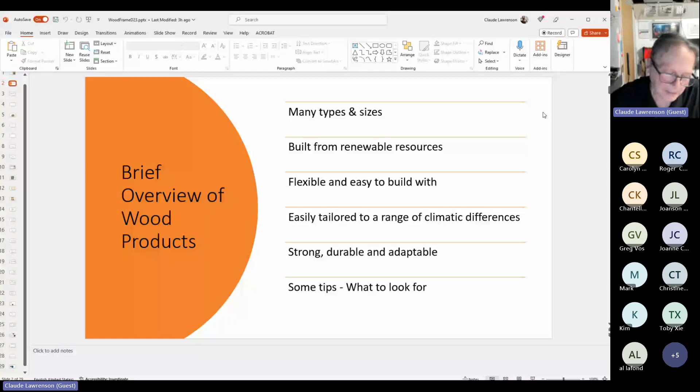Today's presentation is about construction materials. There's a lot of different construction materials out there, but one of the most common certainly is wood and wood frame construction. Wood frame construction has been around for many, many decades, and it's often the most common option chosen for building a house, and in some cases even smaller buildings. Wood is a structural material mainly used for the structure of walls, floors, and roofs.

It's used in what we call today platform framing. In the past, there was another type of framing, the old style, called balloon framing. The major difference was in balloon framing, the exterior walls went up two stories, which meant we probably had to have much longer 2x4 or 2x6 wall construction. So wood framing and its various related wood-based products is really what I'm going to talk about today.

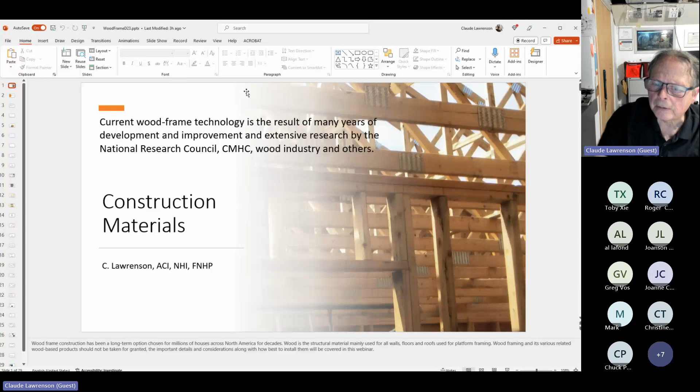Often we take it for granted, but there's some important details we need to think about when we talk about wood frame construction. We're also going to cover a little bit about purchasing or procuring wood for a construction project - a few tips and things to think about before you build that next house.

We have many types and different sizes of wood out there used for construction. It's built from a very good renewable resource, it's flexible and easy to build with, and it's easily tailored to a wide range of climatic differences between southern Canada and even far up into the northwest regions of the country. It's certainly strong, durable, and has proven to be very adaptable.

Towards the end, I'm going to summarize with some tips and things you should actually look for.

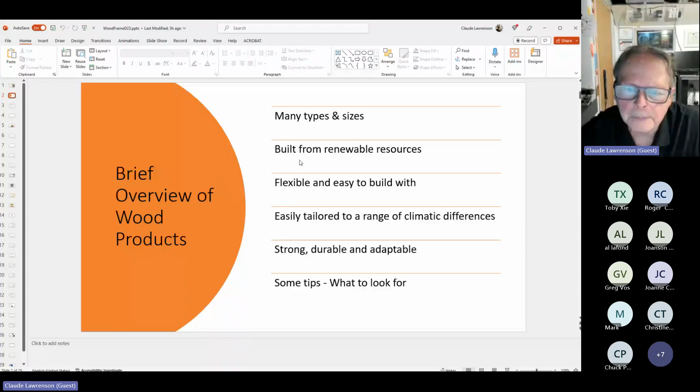A little bit of general information: there's many types of building materials, and certainly their qualities are used in house construction. What I'm really trying to focus on is that word quality with any building material. So the question is, what types of adverse conditions result in premature degradation or premature failure?

In my inspection experience, I've come across wood rot and damage to wood-based materials - and that doesn't include just wood-based materials, but other materials often attached to them, such as drywall, or perhaps even the exterior sheathing that it's being applied to the wood framing. So it requires reasonable care in its design, use, construction, and even down to the detail.

Typically our construction should be based on the National Building Code, or in some cases you may be using the Provincial Building Code. In Ontario, when I built my house, I had to follow the Ontario Building Code. I always like to remind people that the Provincial Building Code is just the provincial flavor of the National Building Code.

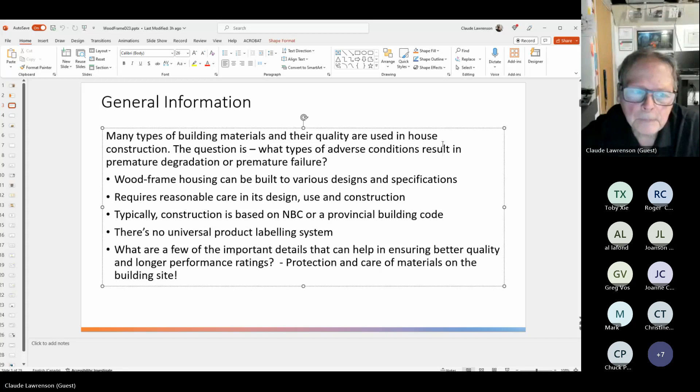Are you aware of these things when you consider housing and we talk about materials? Well, experience has shown that some materials can adversely affect adjacent materials as well as result in premature deterioration. I mentioned earlier what happens when moisture basically travels through from the interior of the house through the exterior walls and creates damage to the wood framing.

So again, there's going to be other damage to the adjacent materials, as I mentioned earlier - whether it's the sheathing, or maybe on the inside, perhaps even the gypsum board, or what most people would call the drywall.

Lumber used for construction in Canada is grade stamped, and I think that's a key thing I want to focus on in this discussion - are you aware that there are grade stamps you should be looking for on lumber, to show that it conforms to the NLGA, the National Lumber Grades Authority, grading rules for Canadian lumber?

The National Building Code lists minimum grades for various uses of lumber and wood frame construction. We'll take a peek at a few of those National Building Code requirements.

Another thing we need to think about is not simply the 2x4 or 2x6, or what some people like to call the stick or the lumber itself. How about engineered wood products? They're routinely used in wood frame construction. These products are equivalent in strength compared to dimensional lumber, but use less lumber, basically using wood fibers in various different forms and shapes.

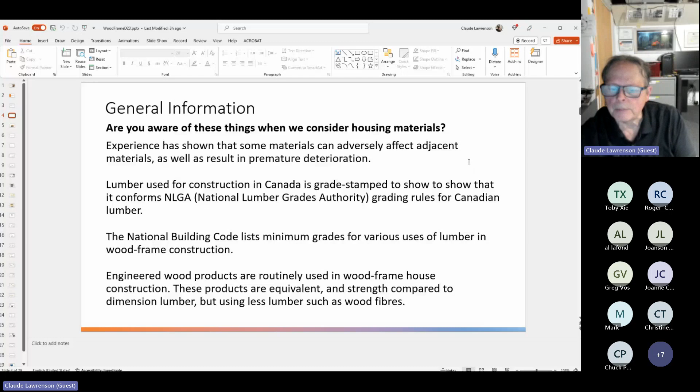This is an illustration from our technical guide for northern housing, and it talks about wood structures in general. When we take a look at this particular illustration, we need to think about the residential building being divided into some main categories. It says 4 main categories, but actually I think it's probably more like 5. So we have the floor beams at the lower portion, the darker orange floor framing, the tan or brownish wall framing with the wall studs and sheathing, and the roof framing. But technically speaking, I actually think there's a 5th one.

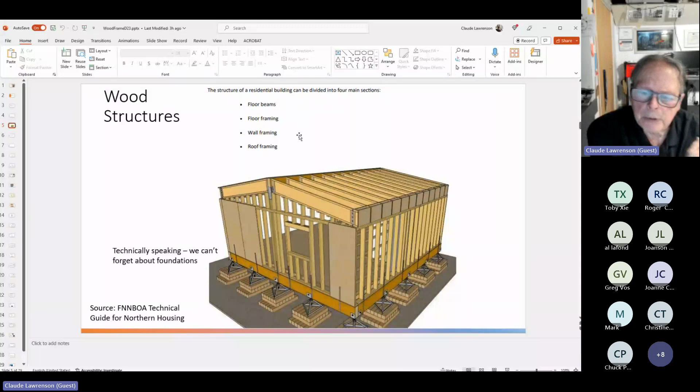We can't really forget about the foundations, because quite often there can be wood framing involved with even the foundations, whether it's pressure treated wood, or how the foundations are going to be created, in some cases by some type of wood framing. The source here is from the technical guide for northern housing, so if you haven't had an opportunity, it's something you should look at, which is very informative.

Next, I'm going to talk a little bit about the Canadian Wood Council. It was founded in 1959 and is Canada's unifying voice for the wood product industry. It's the National Federation of Associations that basically deal with wood, and their members represent hundreds of manufacturers across the country. The Wood Council participates extensively in the development of building codes, and in some of the changes that happen within the building code.

For example, if we take a look at things like the design of wood frame structures for 3 stories or less, maximum spans for lumber for beams, floor and roof joists, roof rafters, and so on - again, that's all dictated by those requirements within the building code.

There's lumber and stud tables. So again, we can basically look at spans, or how high can lumber studs go. Is it okay to use a 2x4 on a 2-story high building? What happens if it goes to maybe 3 stories?

And there's also a nailing schedule. Within the building code, it talks about what size nails are the minimum requirement as far as nailing is concerned, and it's not just the size, it's also the number - do we need 2, 3, or more? Or are other types of fasteners acceptable? And of course we need to not forget about, in some cases, permanent wood foundations.

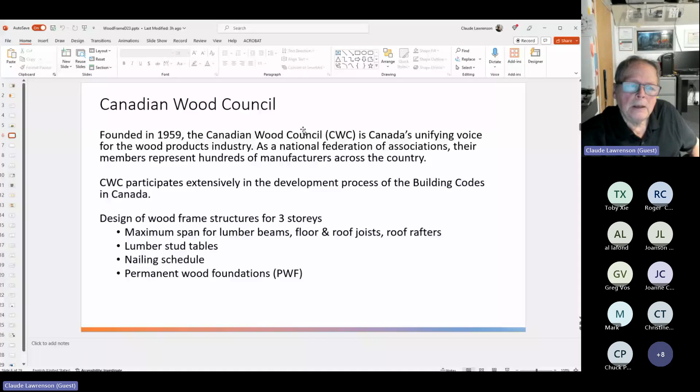So I wanted to back up a little bit and talk about what we see in a typical lumber yard - I like to call it the classification known as yard lumber. So what is a board? When we think of the different terms such as boards, dimension lumber, timbers, factory or stock lumber, these all have some technical reference guidelines.

Boards are typically an inch to inch and a half thick. They're graded for appearance, often used as siding or interior trim when we think of a board.

How about dimension lumber? Well, dimension lumber are things such as the 2x4. Is it really 2 inches? The answer is no - that's what we call the nominal dimension. The actual dimension of a 2x4 is something in the range of an inch and a half by 3.5, an actual size by the time it's finished and dressed down. In some cases they're going to be wider, and they're going to also be graded for strength or stress rather than just simply appearance. Commonly we see different classifications, which we will take a look at shortly.

So light framing, joists and planks. Joists and planks go into the 6-inch and wider range.

Decking, 4-inch and wider range, and sometimes we get into decking select and what they call commercial grade. Timbers are often basically something that's quite a bit larger, so 5x5 and larger, again graded for strength and durability, often stocked in green undressed condition.

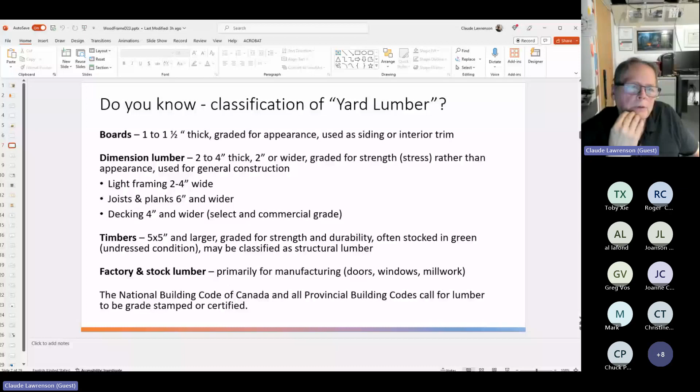Well, what's this proper grading all about? So the lumber grading is essential because it helps ensure the wood is suitable for its intended use. If a piece of lumber is incorrectly graded, it may not be strong enough for its intended application, which could lead to structural failure and potentially dangerous consequences.

So in this little chart, the chart is actually a portion, an illustrated snap capture of table 923.42. 923 is basically your wood frame construction in the building code. And if we take a look at it, you'll see the most common grades of lumber include, and I've listed them off to the side: select structural, and then I pointed to it in the actual table. Number 1 common, number 2 common, and number 3 common.

Not so much do they use the word common, but quite often when we refer to it, it's just number 1, number 2, or number 3 grade. We can see if we take a look at this particular caption of the table, it calls it the commercial designation. So we can have different types of species of wood lumber. This one I've chosen is what we call SPF, spruce, pine, and fir. You could have certainly other materials, it could be fir, it could be other types of materials, as I mentioned.

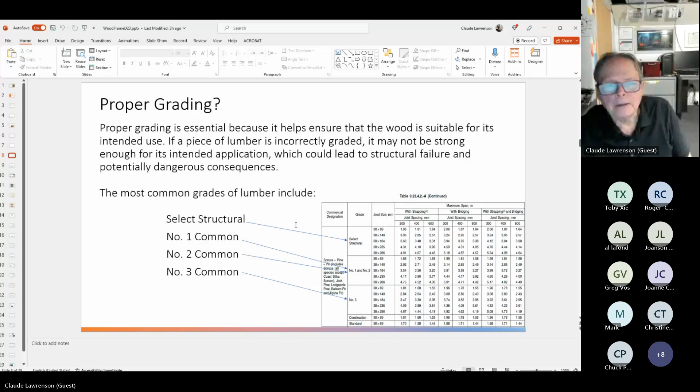Well, when we take a look at lumber and wood products, this is again a capture from the National Building Code. It talks about grade marking. So if we take a look at one of the requirements, it says lumber for joists, rafters, trusses, and beams, and for the uses listed in table 9321, basically all our structural framing lumber, or even framing lumber, not alone just structural, shall be identified by a grade stamp. So that's where I like to halt for a moment and talk about this.

But again, minimum lumber grades for specific end use. So again, when we look at the National Building Code, in the clause requirement up top, we take a look at the use category. For example, stud wall framing, the very first one, and I'll jump all the way down to say roof sheathing or subflooring, wall sheathing when required as a nailing base. And it talks about what types of boards and what types of framing and what type of species and categories. So you can see here stud standard number 2 grade for stud wall framing is acceptable.

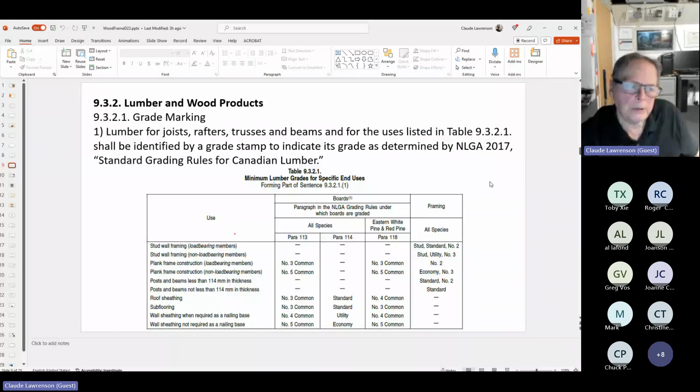Let's take a look at what grading is all about. I've shown a few examples here. Off to the side, we can see this is off of a sheet of plywood. It's got that greenish tinge, so it's been treated lumber. We can see some few dark spots - those are the knots within the plywood skin itself.

Over in the picture below, we see these are 2x4s, and we can see the word kind of on an angle there. These are select grade 2x4s, and we see the actual stamp above - that's the mill. So that's where that information comes from, where it was actually milled and where it comes from. So there's material here, and we also see it's select grade. Select grade, by the way, is a pretty high standard.

When we come back to the actual grading and this depiction, here's an example of a grade mark in the lower left. It says it's stud grade, so it's for a stud. It's HRA, heat resistant adhesive was used, so it becomes stronger. If we take a look at another example here, we see HRA again, and a little more information - this one says S-dry, so it's drier.

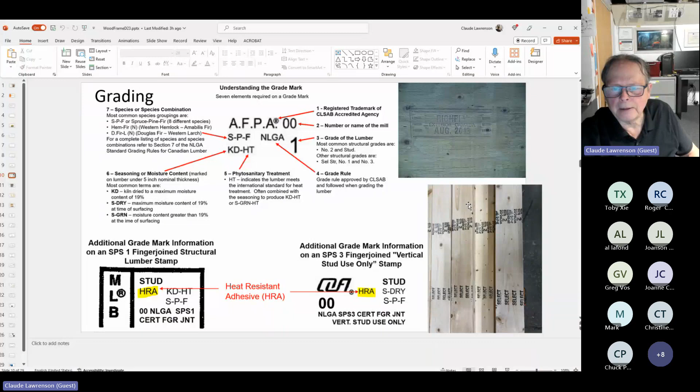Let's take a look at another building product. In this case, we have floor joists. These floor joists, an engineered wood building product, should be identified by some type of grading mark. In this case, it's CCMC. Actually, these floor joists have been tested through the National Research Council of Canada. That's great because it tells us automatically, if I'm the inspector on the job, it meets the building code. There's no question about it.

Over to the side here is a reduced down copy of the 5 or 6 pages of the actual testing of the product material itself. You'll see, for example, it says here, this was TJI, CCMC 13132-R. What do we see up here? These are approved - they've been tested by the National Research Council. These are automatically accepted within the building code. So again, look for the label, in this case grade or grade marks, to indicate that this is approved material. It meets a standard that in some cases goes even beyond the minimum base standard.

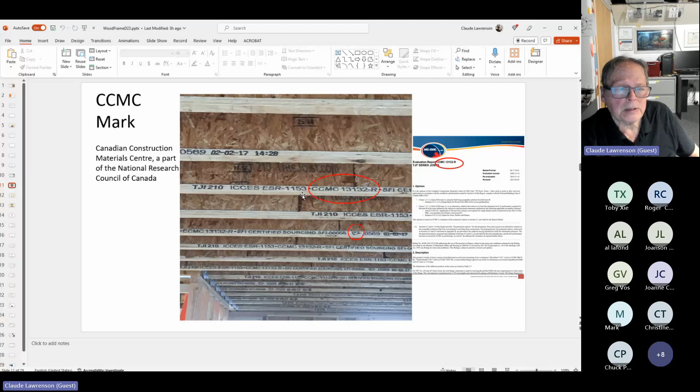Let's take a look at a few other views here. So we see plywood grading - how is plywood graded? We can see there's a grade A, a grade B, and a grade C. A lot of this, from a visual perspective, is - grade A, I don't see a lot of knots, very few if any. Grade B, some dimples here and there. And grade C, we can see more of them.

This was from the source of the Canadian Wood Council, taking a look at their information. Modified construction varies from standard plywood in that the grain direction of the plies, the number of plies, and the thickness of the panel is modified. Plywood is plies in alternating sheets, basically creating our 4x8 sheet of plywood. Standard plywood, symmetrical about the center ply, is used for the most structural sheathing. Modified plywood is used for the most formwork, so because it's going to be below grade, grade C is probably better. But if you wanted something a little more finished looking, then we would take a look at this particular grade A.

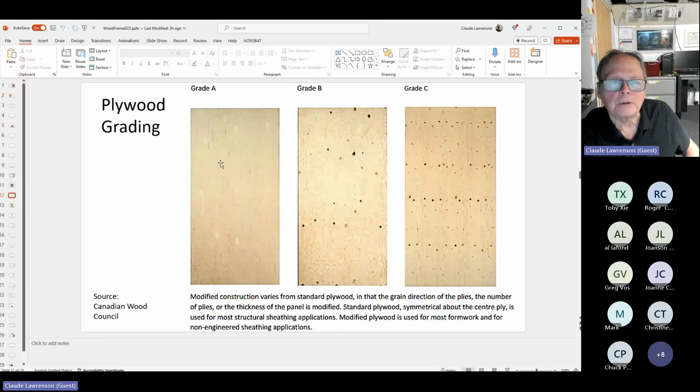National Building Code 2020 version. This is the most current version.

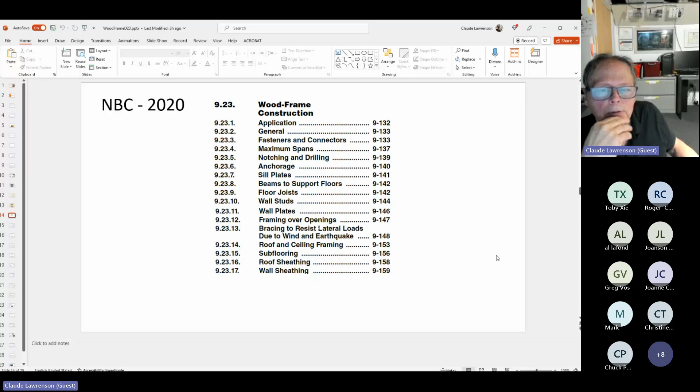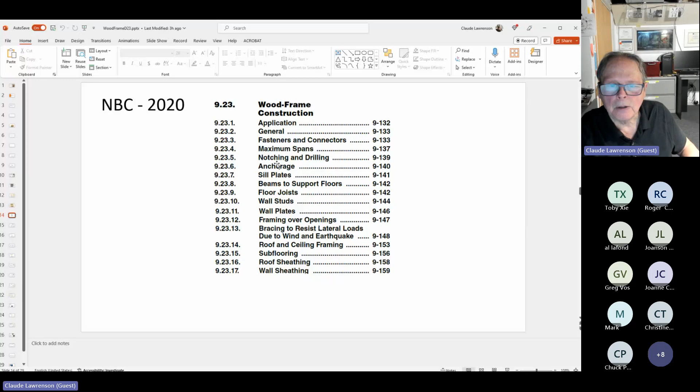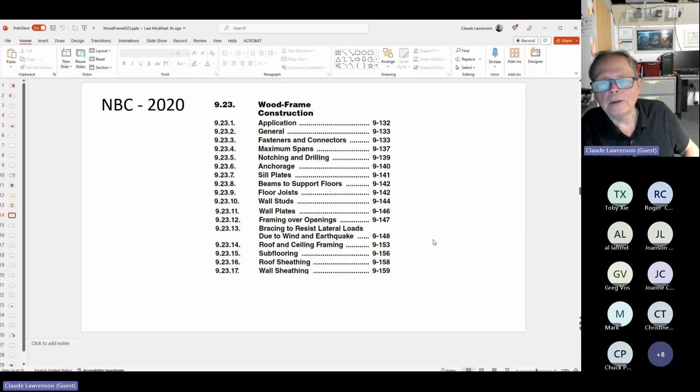I mentioned section 923, and we can see there we have 20-some pages virtually of wood frame construction requirements. Everything from the application to the fastener connections to spans, what happens if we want to cut, notch, or drill, how do we anchor, and going on to beams, joists, wall studs, and so on, subflooring. So there's a lot within the building code that we need to be aware of when we think about wood frame construction.

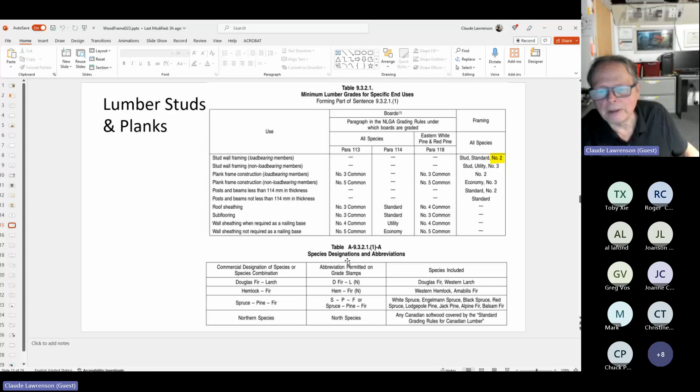When we take a look at code requirements, this is where we can call on the inspector to either say what I see is good, or perhaps maybe it's not so good, and we need to rethink what's going on here. So enforcing code as an inspector, we could say section 9322 on lumber grade says, except for joists, rafters, trusses, and beams, visually graded lumber shall conform to the grades in that particular table. What happens if what you have doesn't? Well, I guess that's up to the local authority having jurisdiction.

And then it goes on to machine stress rated lumber, OSB, wafer board, plywood markings, moisture content. Another key factor is when we talk about moisture content, I have a moisture meter, both one that has a metal probe, and I can measure the amount of moisture in the wood. The moisture content of lumber shall be not more than 19%. Well, if it's left out in the rain and the snow and the elements, it's certainly not going to be 19%. In fact, sometimes you're even lucky if it's 19% coming out of the lumber yard, because did they leave it out in the rain and the snow and the elements?

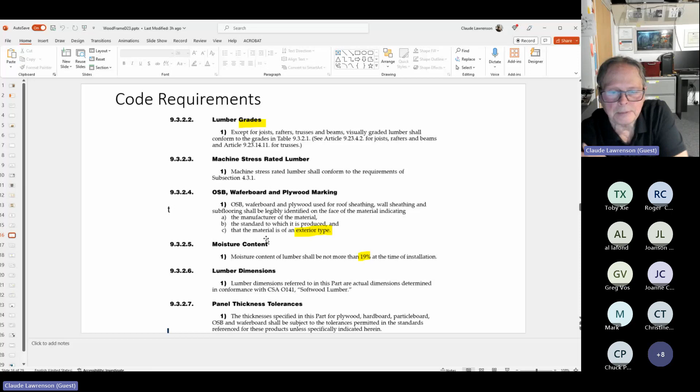I just wanted to talk briefly about termites. We may not hear too much about termites in all areas, but there is a requirement within the code for protection regarding termites, and certainly on the other topic there, decay protection.

In doing inspections, it was quite often that I would find termites, especially in old wood cottages. The termites came in from the south, and actually they didn't even come in from the south of the USA. They were basically brought over by other elements called ships across the ocean and somehow infected wood in areas such as the deep south of the USA and basically migrated north.

So even for my area, areas such as getting up towards Toronto, there can be termites. So we have to look, especially as an inspector, to see is there termite damage? Or the other way of looking at it, for new construction, because it's in a termite zone, do we have to have protection for the wood itself?

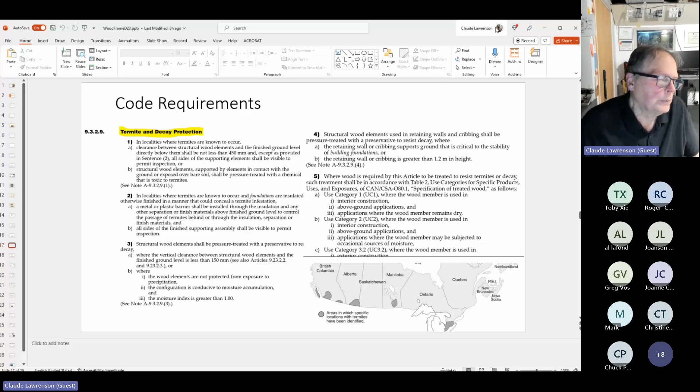Let's talk a little bit about the structural side of things. The Building Code Section 9.4 talks about the structural requirements. Well, we don't necessarily need an architect or an engineer to design all buildings. We could have somebody who is very good at drawing house plans and able to use the building code and follow it to come up with a good set of drawings to build a house or building.

But if we take a look at the general structural design requirements in the building code, subject to application limitations defined elsewhere in this part, structural members and their connections shall: A, conform to the requirements provided elsewhere in this part. Sounds like a whole bunch of legal language, and it technically is. Be designed in accordance to good engineering practice, or be designed in accordance with Part 4 using the loads and deflections, which basically means engineering.

So when we take a look at the structural requirements, pretty much most residential buildings, unless they get to be very large, you can basically build from the old traditional building standards, as long as it follows the current building code. There are some application limitations, as it says: is it 600 square meters? Is it 3 stories or less? Is it residential? And so on. There are specific requirements spelled out elsewhere in the building code when it comes to structural requirements.

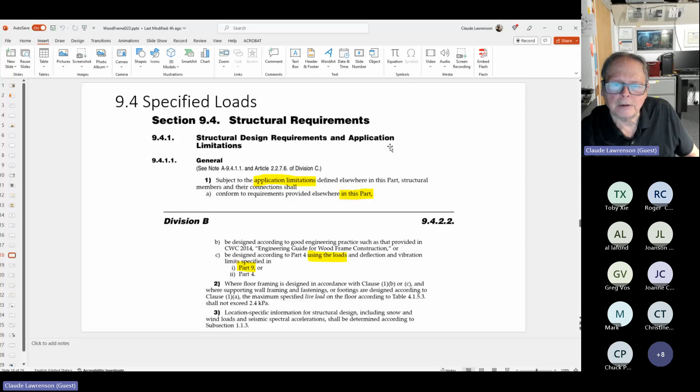But I want to touch a little bit on the specified loads, because in areas in the extreme north, we might have a roof that accumulates a lot of snow on it. Is there a chance for roof collapse? The answer could be yes. Likewise, we want to make sure that from a structural point of view, it's a safe living environment for the occupants of those particular homes or buildings.

Another way to take a look at this is the specified loads. This applies to light frame construction whose walls, floor, and roof planes are generally comprised of frames of small repetitive structural members, such as 2x4s, 2x8 floor joists, 2x6 ceiling joists, or 2x6 roof joists, and so on. The roof and wall planes are clad, sheathed, or braced on at least one side.

Typically when we're looking at sheathing, we probably would put some type of plywood sheathing, or it might even be rigid board type insulation. But with that, I usually recommend some diagonal bracing, because we need to stop the wood frame from moving side to side, racking.

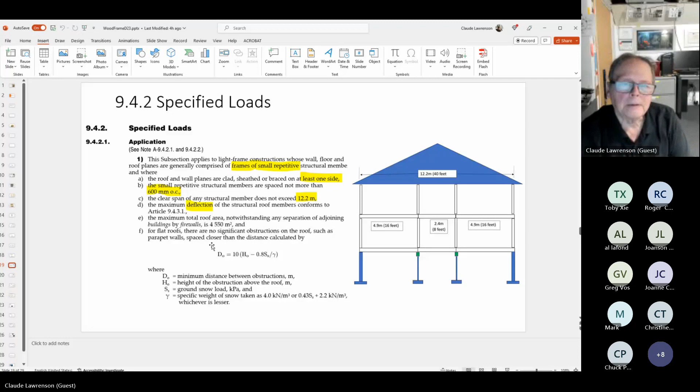Double the requirements between Saskatoon and Churchill, or almost double. And another one, Lac du Bonnet, 54.3 pounds per square foot. So when we take a look at the building code, these are things we need to think about when we're building. A 2x6 rafter in Saskatoon probably would work, but when we take a look at Churchill, maybe we need something much deeper and stronger to carry this roof load, because this is based on snow on a roof.

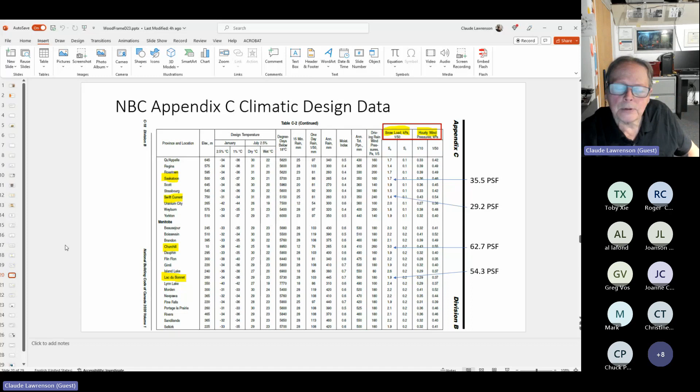And of course there's other categories here, for heating and cooling design temperatures. And over here we can see wind pressure and accumulation of rain and so on. So I just wanted to point out that when we use the building code, it helps us design better. That's sometimes one of the elements that's missing - a set of drawings isn't always a good set of drawings, though sometimes there are some great sets of drawings out there.

On the topic of structure, I want to talk a little bit about deflection - maybe another term you might use, there's a dip in the floor. How much of a dip is actually acceptable by the building code? When we talk about deflection, I like to use a little illustration because sometimes the words get a little muddied, being legal mumbo jumbo of code requirements. Sometimes a little illustration helps indicate what deflection is.

Again, the building code talks about how do we control deflection. What should we look for as a minimum building standard so people don't end up with these big dips or low spots on the floor? And what is acceptable? Again, the code talks about that.

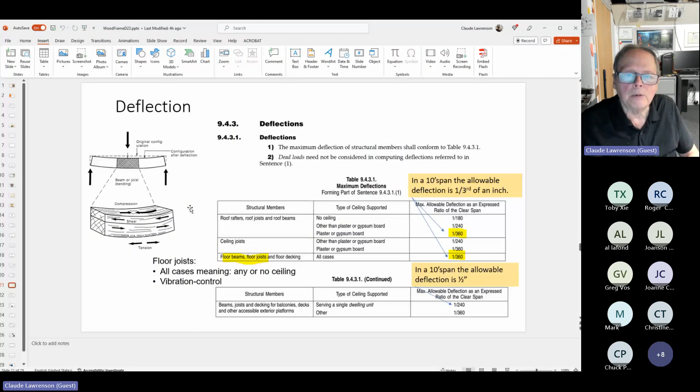So how do you stop the floors from deflecting? Well, sometimes it depends on what they call camber or crown up or crown down. Again, in the framing, hopefully the framers understand that you always want to have that crown facing up.

Another area, when we talk about engineered wood products such as those TJIs we looked at earlier, one of the big things a lot of fire departments are concerned about is fire and pre-engineered floor joists. A lot of homes and buildings today use this type of flooring system. But what we have to remember is pre-engineered floor joists are made up of wood chips and glue, and they burn twice as fast as traditional wood floor joists. Traditional lumber joists burn in approximately 15 minutes versus 4 to 6 minutes for a wood chip joist.

I've heard in some instances where the fire department, if they knew it was an engineered wood product, they will not enter the building for their own safety - the floor could collapse on them. And certainly if it collapses, someone could be seriously injured or perhaps even killed.

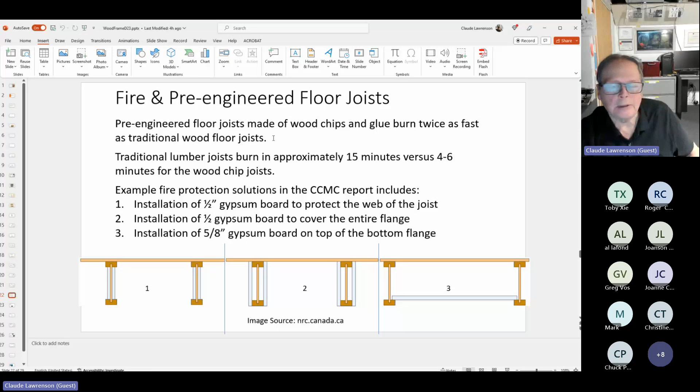Okay, let's talk a little bit about the material on the outside. In the building code they like to call it cladding, which is basically your outside finish. The building code requires a sealant to be applied to any location through which rain or snow would be able to penetrate and back up the assembly. It talks about the required sealant.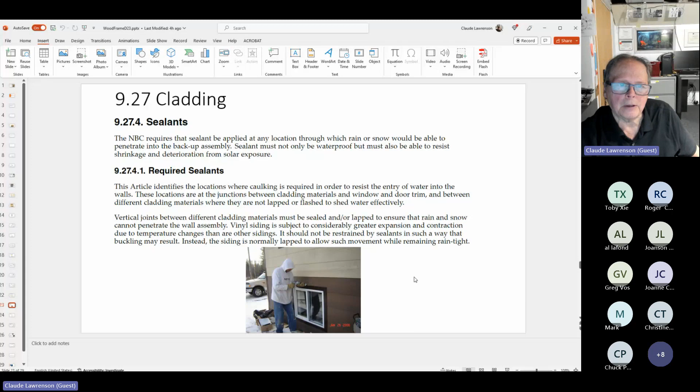So again, under cladding, they talk about lumber siding. Lumber siding shall be sound, free of knot holes, loose knots, through checks or splits. Again, some description of the characteristics of different defects within wood. It talks about the thickness - we just don't want something thin on the sheathing, or the cladding rather, but rather something of substance.

And what about the joints? They talk about lumber siding shall prevent water from entering at the joints by the use of lapped or matched joints or by vertical wood battens. So again, there's the description of basically the material itself from the point of view of thickness and width, and how do we deal with the joints.

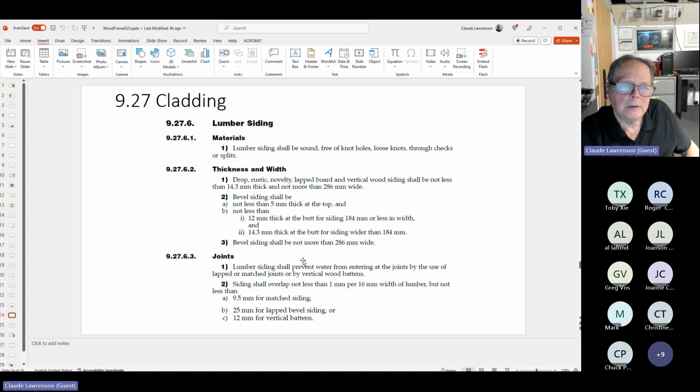So any openings around the materials, such as at that window or a door, needs to be sealed. We must think about it must be installed with proper joint treatment and flashing. Requires installation according to manufacturer's instructions - again, does everybody read the manufacturer's instructions? Not always. In absence of recommendations, the code requires minimum lap coverage depending on the siding material.

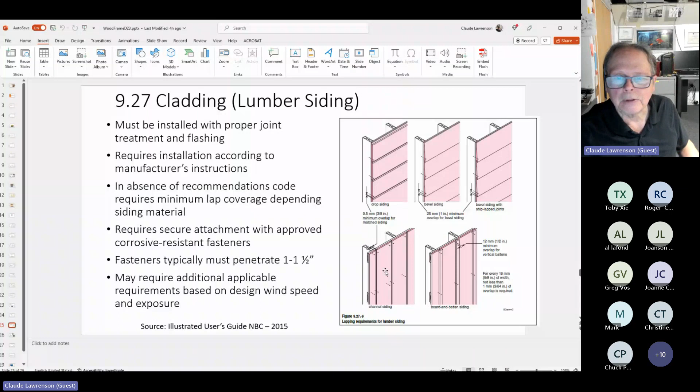Requires secure attachment with approved corrosive resistant fasteners. So again, we go into the fasteners - they must penetrate 1 inch to 1.5 inches through the material. May require additional applicable requirements based on the design, wind speed, and certainly exposure. Again, one size does not always fit all because we have to look at the climatic differences between the north of a province and the south of a province, right?

So let's get down to a basic review, kind of getting towards the wrap up here. Check the material for certification and grading labels. So again, you can see we have our grading stamps here, where it came from, and basically what grade it falls under - in this case, select. Is the material suitable for the purpose it's intended for? That's what the building code basically asks.

Verify material quality. Are you getting exactly what you paid for? Sometimes I've visited, and maybe some of you have visited, those ones that look more like a hockey stick than an actual straight piece of 2x4 or any other type of lumber. Are they sort of, kind of out of whack? Got a big bow in them?

Are the joists and beams installed with the high point, the crown, pointing upwards? I mentioned that before. So we can see here, if the crown's pointed down, you're already fighting that whole early commentary about adding to the deflection. But if we basically eye along the edge of either the top or bottom, we can see if it's either dipping downwards or upwards. It should always be installed by a good framer with what they call the crown up.

Once we put our weight on it, it's going to basically settle down to a more level playing field, and certainly not cause these big dips in a floor system.

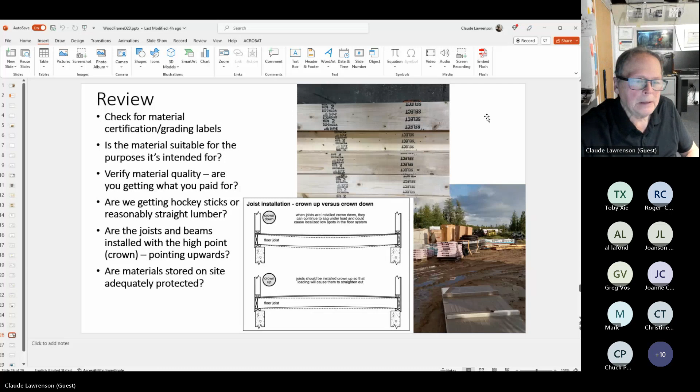Okay, so getting down to characteristics, materials, and appliance systems and equipment. What does the building code say when it comes to enforcement? All materials, appliances, systems, and equipment installed to meet the requirements of the code shall possess the necessary characteristics to perform their intended functions when installed in a building.

Some of the characteristics I pointed out earlier are simply the things we need to look for when we think about even just wood framing. Wood building products are subject to moisture, subject to bending stresses, subject to deflection. Are we getting the right material? Is it okay for the span or the actual work it's supposed to perform?

Again, storage on the building site. All building materials and appliances on the building site shall be stored in such a way to prevent deterioration or impairment of their essential properties. When we take a look at things stored out in the elements, it certainly raises the question of whether it's going to be good enough for that particular build.

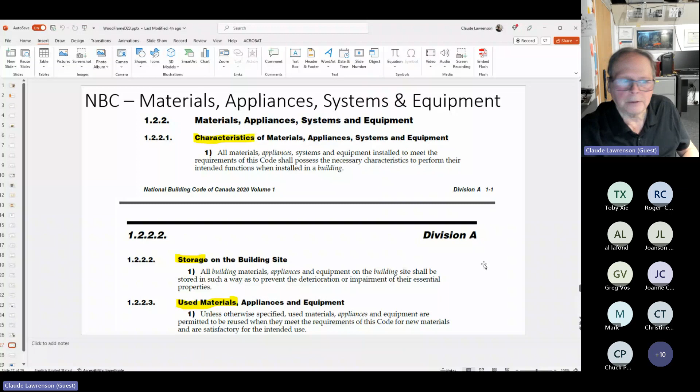Some closing thoughts. Lumber not grade stamped - yes, building framing can be rejected if the lumber used in its construction is not grade stamped. Now, that doesn't always apply because if there's no inspections, well, we don't know, sometimes not until it's late. But during the construction stage, if it was inspected and we see that it is grade stamped, we're going to end up with a better quality build to begin with.

Building inspectors generally will not approve a structure that has been built with ungraded lumber because they have no reliable way of knowing whether the structural materials will support the loads they're supposed to represent, compared to ungraded lumber. The others have been tested and proven.

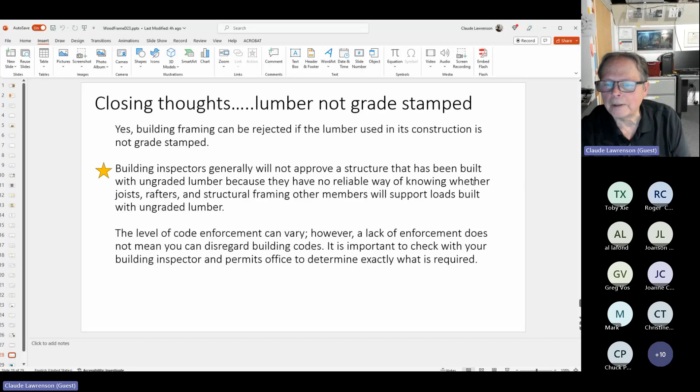The level of code enforcement certainly can vary. However, a lack of enforcement does not mean you should disregard building codes. It's important to check with your building inspector and permit office to determine exactly what is required.

Just to wrap up here, a few resources I referred to: Booklet number 9 in our Technical Guide for Northern Housing series, that's with First Nation National Building Officers Association, and certainly the Building Code 2020. Some items were taken from what they call the Illustrated User's Guide, which is a complement - it's not building code, it's just a way of illustrating and describing some parts of the building code for clarification. And there was a large part of dedication and resources from the Canadian Wood Council.

That basically wraps up the end of my presentation for this particular session. If you think there are other materials we could use for future webinars, please let us know. Some roofing materials are sometimes a good topic. I did one on windows and doors, but when we look at building products, hopefully every community gets a better build. I think that's what we're trying to strive for - better building, better built homes for First Nation communities, and not just for First Nation communities, for all of Canada, because there's bad builders out there, and there's some really good builders out there, but you need to know what you're dealing with, and hopefully you don't run into too many problems where houses need to be replaced too quickly.